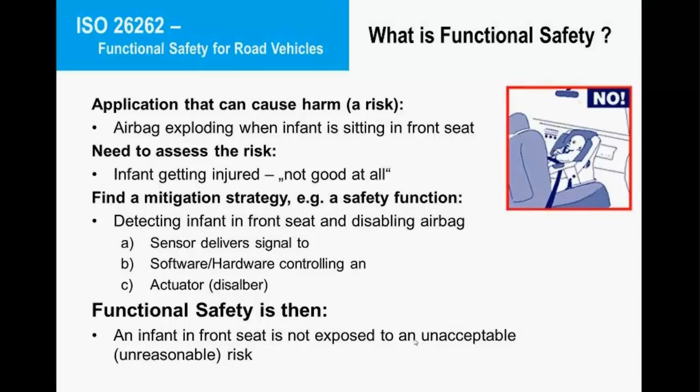So the ISO 26262, where does it come from? It's the functional safety standard for road vehicles, an adaptation of a very common standard, the IEC 61508. There are a lot of domain-specific standards for different domains which are adaptations of IEC 61508.

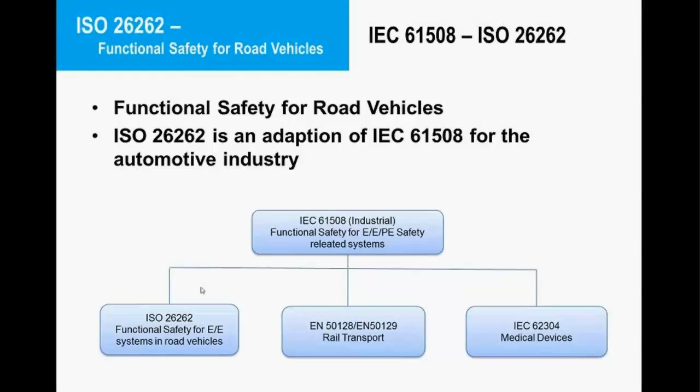We are looking here into the ISO 26262 with a special focus on functional safety for road vehicles. What are the main concepts or components of this standard? ISO 26262 provides an automotive safety life cycle which covers all phases from initial definition till disassembling of the product. The life cycle is mainly based on a V model, and ISO 26262 adds additional steps or phases to your existing V model concerning functional safety.

You're allowed to tailor the necessary activities during these life cycle phases, depending on whether you will do a complete new development or a modification from an already existing product.

The ISO provides an automotive-specific risk-based approach to determine the risk classes. It's called the ASIL, the Automotive Safety Integrity Level, and this risk approach is based on the item. But what's an item? The item is the system or product you develop. It could be, like in our example at the beginning, an airbag system, or another electronic control unit like a braking system or a window lift.

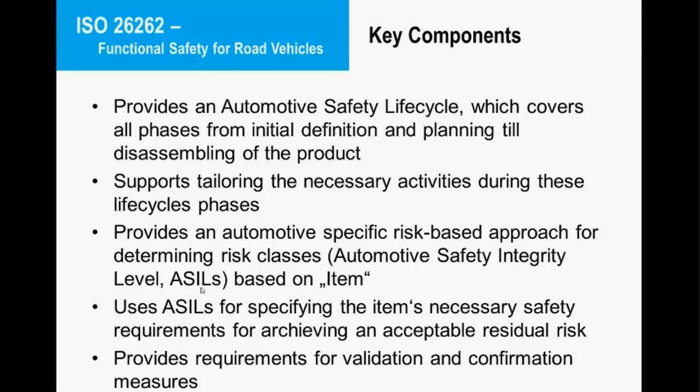Or if we think more on the whole vehicle, it could be the whole car itself. These ASIL levels are used inside the standard to specify the necessary safety requirements needed for achieving an acceptable residual risk. Also based around the ASILs, the standard provides requirements for validation and confirmation measures.

ASIL, the Automotive Safety Integrity Level, is a key component inside the ISO. It will be determined at the beginning of the development process, not at the end. What's analyzed is the function of your system with respect to possible risks or harms. Defining the ASIL, you ask: if a failure arises, what will happen to the driver and the associated road users? So it's a very high-level view from the point of the driver.

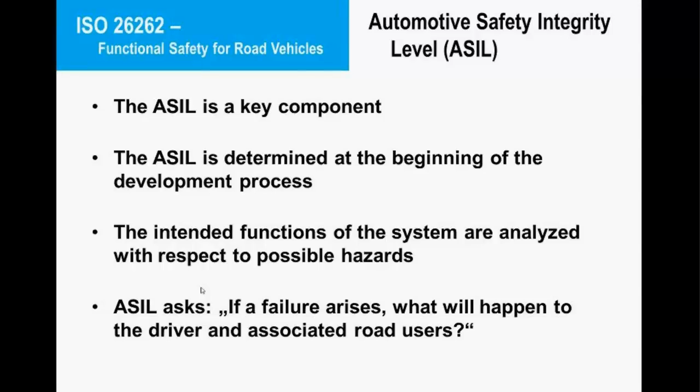ISO 26262 is split into 10 parts. The main parts are listed here, each focusing on a specific area of your development process. Part 2 is more or less the management of functional safety, how you integrate the different activities, assessments or audits into your project management plan.

Part 3 is the concept phase, mainly covering hazard analysis, risk assessment, and definition of the ASIL. Then we have the V model for part 4, with focus on the system level. Part 5 focuses on hardware level, and part 6 on product development at the software level. Part 7 focuses on production and operation, and, also interesting from the point of a software tool supplier, part 8 covers supporting processes.

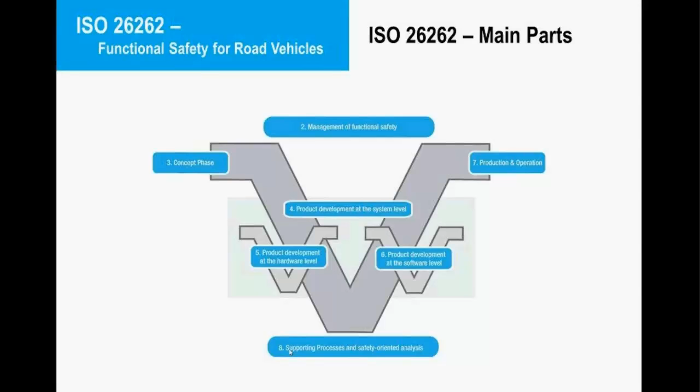This part defines not only how you have to define requirements according to the ISO or your configuration management process, but also that each software tool used during the development process has to be qualified, so that this tool is able to support your process development or product development.

So let's look a bit more in detail into part 3, our concept phase. Listed here are the steps defined inside the standard for the concept phase. The first step is to define your item: what are the functions of the product I will develop, what are the interfaces to other systems. The next step is the initiation of the safety life cycle, where you decide whether the product is a complete new development or a modification of an already existing product. The next step is the hazard analysis and risk assessment.

The last step defined in the concept phase is the definition of the functional safety concept. Here you derive the functional safety requirements from your so-called safety goals and allocate them to a preliminary system architecture.

Today we will look mainly into this step, hazard analysis and risk assessment. Looking in more detail, this step is already split into four more detailed steps. The first is the identification of possible hazards of our system. Then we classify our hazard, and after the classification, we do our hazard determination, and at last we define the safety goals derived from our hazards.

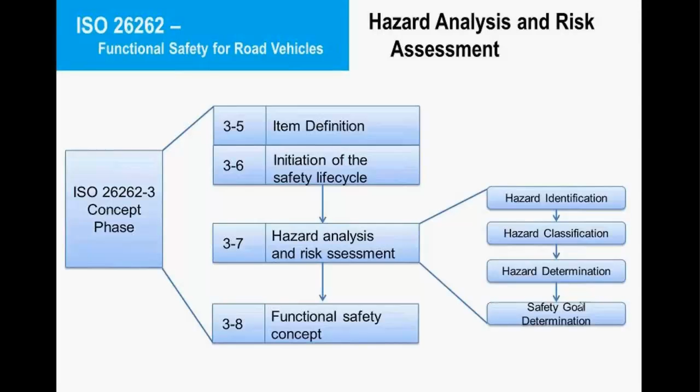So how can you classify your hazards? The standard defines 3 parameters for specifying a hazard: the probability of exposure, the controllability, and the severity of the failure. Based on this, the ASIL will be determined.

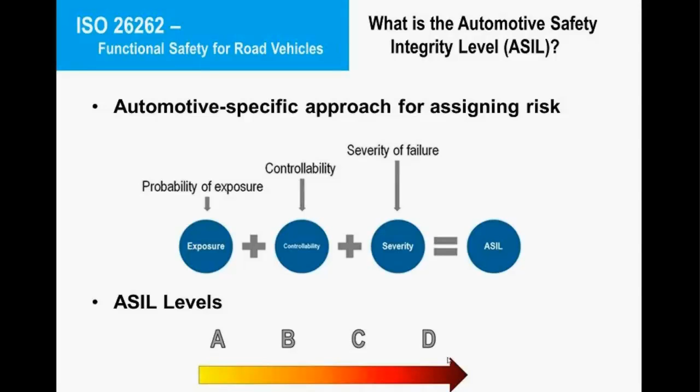Our standard knows about 4 ASIL levels: ASIL A, B, C, or D, and ASIL D is the most severe ASIL level.

Going back to our simple example, how will you determine the ASIL for our airbag system? First we look at the probability of exposure. This parameter is scored from E0 to E4, and the question is: how often will an airbag explode while an infant is sitting in the front seat? Well, I guess not so often, so we will score this around E1.

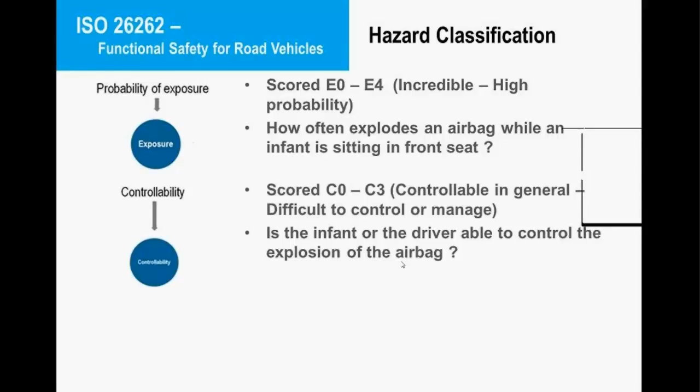The next parameter is our controllability. Scoring is between C0 and C3, and it's asking: is the hazard controllable? Will the infant or the driver be able to control the explosion of the airbag? I guess in most cases no, so we will have here C3.

Our third parameter is severity of the failure. What will happen if the airbag explodes? Here we have scoring between S0 and S3. S3 means life-threatening injuries. Yes, that can happen if an infant is sitting in the front seat and an airbag explodes. So we will have here E1, C3, and S3.

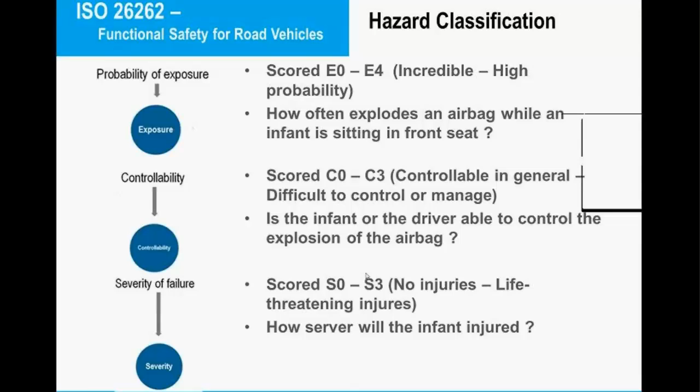The standard provides a table where you go in with these 3 parameters and you find which ASIL level belongs to your hazard. So we go in with severity S3, exposure E1, and controllability C3. What we end up with is ASIL A.

Looking at this table, you will see a lot of QM. What does QM mean? QM stands for quality management. This means the hazard is rated not to be so serious, and normal or regular quality management methods are enough. You do not need to add additional activities to your process according to functional safety. You only have to follow ISO 26262 if you have a hazard rated with ASIL A, B, C, or D.

So let's look whether we have questions so far. Okay, well, we have one question. It's a sample for a headlamp bulb, and the question is whether you need to develop this bulb according to the new ISO 26262 standard.

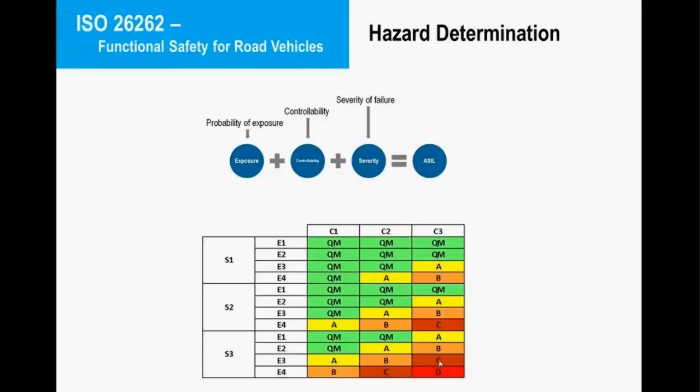So let's look at what Polarion provides for you if you need to develop according to ISO 26262. Polarion itself is, as I mentioned before, an ALM solution, so it comes with a bundle of features which will help you comply to ISO 26262 by default. You will get traceability.

This traceability is requested very heavily inside the standard. You have to ensure that the hazard is linked with the derived safety goal, with the derived functional safety requirements. You have to ensure or show that you have used all methods which the standard requests if you have an ASIL A, B, C, or D function in your product.

Additionally, the standard requests that each software tool used during your process development needs to be qualified. Polarion has done a tool qualification with TÜV Nord and is qualified as a trusted tool according to ISO 26262 up to ASIL D. Polarion is also qualified according to IEC 61508 up to SIL 3.

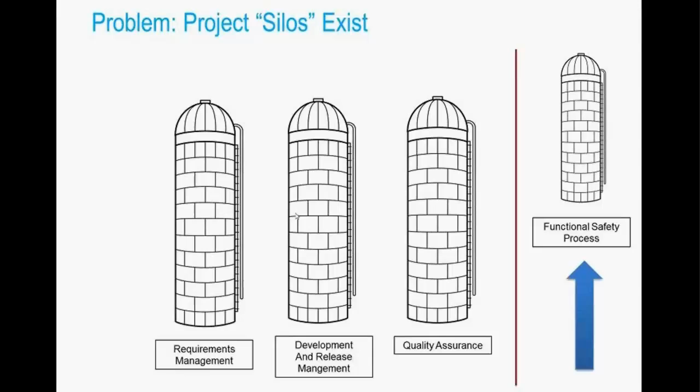If you look into the functional safety area, this area is mainly not integrated. There are at least no tools used, or if tools are used, one very common tool is Excel to collect the hazards and do the ASIL determination. But there is a missing link to integrate functional safety with all your other

project domains or disciplines, and this is the motivation behind the Polarion ISO template. It's the idea to integrate the functional safety concepts like the hazard analysis with the whole project development, to integrate the hazard analysis with your requirements management, with your design specification, with your tasks, with your test cases, so you have it all integrated and not segregated.

So what will the ISO 26262 Polarion project template help to answer? It will make the functional safety, your hazard analysis, traceable and auditable. It will answer questions like: who made changes to my hazard analysis? When were the changes made? What was done to mitigate hazards? What actions were taken to mitigate the risks? Does my ASIL inheritance, which is requested heavily by the ISO, comply with the standard or not?

It will help answer questions concerning coverage. Do we have defined at least one functional safety requirement for a safety goal? So the template itself will add additional elements to your Polarion projects and is centered around part 3, the concept phase. If you look into the standard, there is a need for additional work item types.

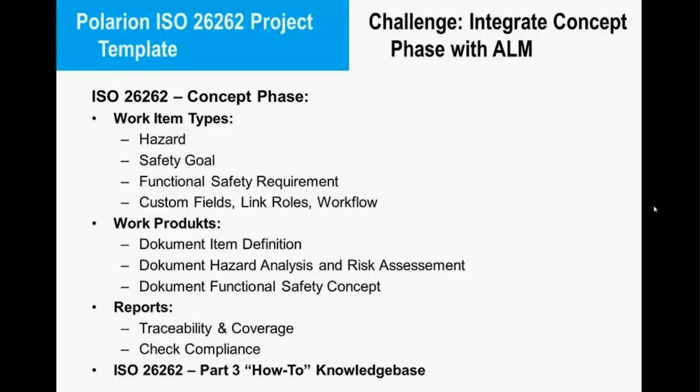Let's start with the live demonstration. The first scenario is we will examine a bit the ISO 26262 Polarion project template. We'll look at the additional work item types, at the documents, and the possible reports.

Okay, here we are inside Polarion. I'm using a Firefox browser and I'm connected to my local server, and I have prepared here a sample project which is created using the Polarion ISO 26262 project template. We have here our integrated wiki, which allows us to present all the information around our project, and we have here a special area which is the starting point for the ISO 26262 support.

Let's just click in and we will start looking into this special area which was added by the ISO Polarion template. So we have here again the different parts of our standard. We see, okay, we have an overview about the hazards which are currently defined in our system, and the status of our hazards. We have links to the relevant work products like the item definition.

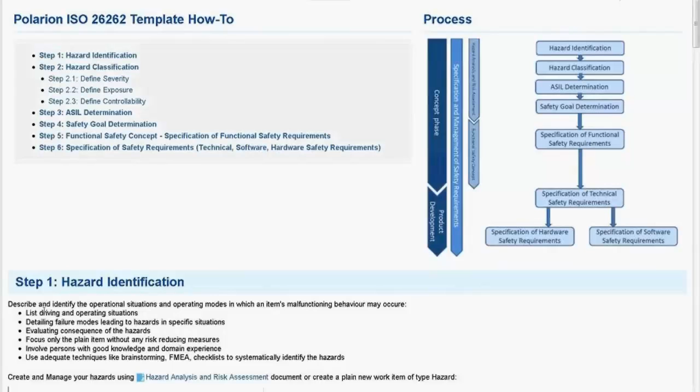And we have here a so-called how-to, and let's start looking into this how-to a bit. This how-to describes in detail part 3 of our ISO norm, and you see here the different steps like hazard identification, hazard classification, and here on the left hand you have more detailed information on what the standard requests and how you can manage this with Polarion.

The first step is the hazard identification. So you have to list the driving and operational situations in which the hazard can happen, and you can create and manage hazards by using a special Polarion document, or you can create a plain new work item of type hazard. Let's go down here.

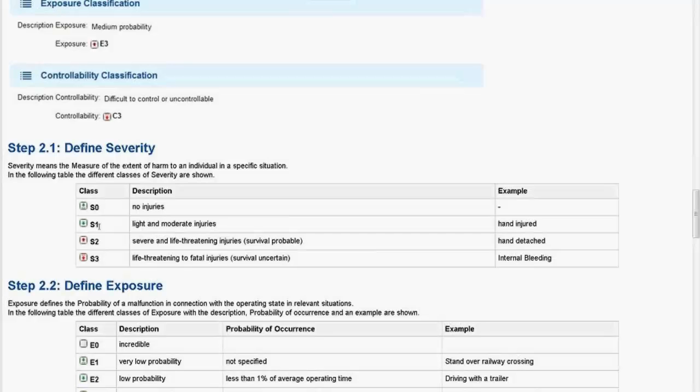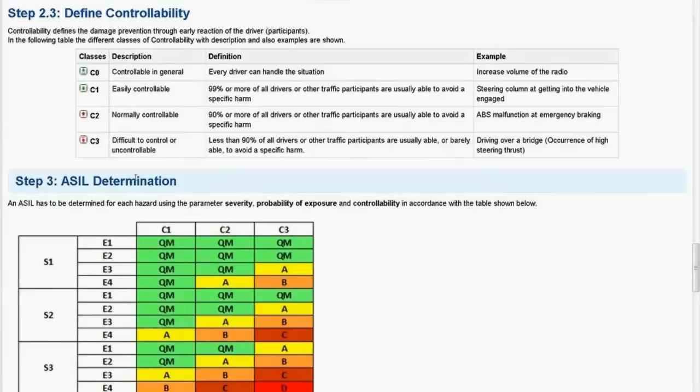You have the explanation of how you can do the hazard classification, how you can define the severity, including a short description and examples for the different levels, also for exposure and controllability. You'll find here the ASIL table, which helps you to determine the ASIL level. And the next step here is the safety goal determination, very detailed on how you have to use the standard and how you can do it with Polarion.

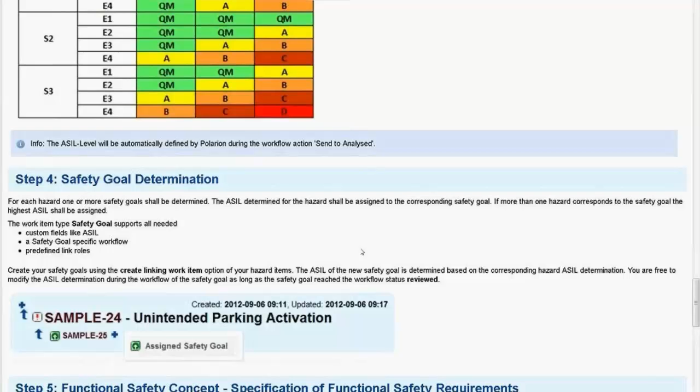So let's go back to our starting point. What else provides the Polarion ISO 26262 template? We see here a couple of reports.

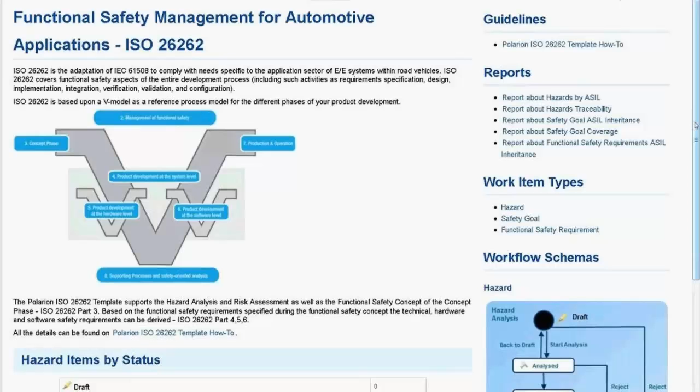It adds work item types, and let's just look what's behind this hazard work item type. We will see currently we do have only one hazard defined, and on the right hand here you see the details of the defined hazard. If you look here, you will find additional fields which are requested by the standard, like the ASIL classification.

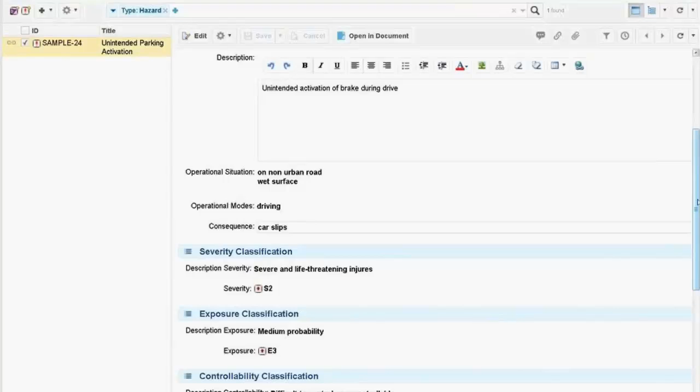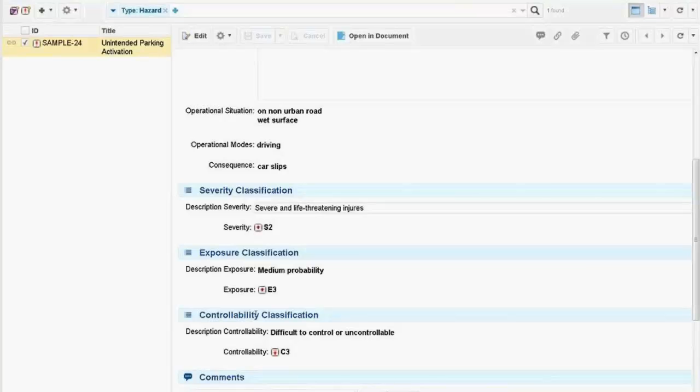We will see here, okay, inside our description we have fields which relate to the operational situation, the operational modes, and consequence of the hazard fields, which helps you to define your hazard according to the standard. Here we will find the different parameters like severity, exposure, and controllability, which are requested for the determination of the ASIL level. And we will see here the link roles.

So if we create or select this to create a linked element, the template ensures that you can only link a safety goal to your hazard. This is requested by the norm.

If we go a step down and look into our safety goals and see here, okay, I'm allowed to link a functional safety requirement to my safety goal. This is also checked by Polarion, that you only link functional safety requirement to your safety goals.

So what else is interesting? We have here the workflow, a specific workflow. So we are currently in the status analyzed, and the next status would be start progress. But I guess it's easier to look this up in our hazard analysis home. Here we have the reference to the workflow. We see our work item type hazard, an overview of its workflow.

Whenever you create a new hazard, it's in status draft. Then you will start your analysis. You will do the classification of the hazard, and after this, you will set your hazard to the status analyzed, and then the development will start. It's in progress, and after the whole development is finished, the hazard is completely and mitigated.

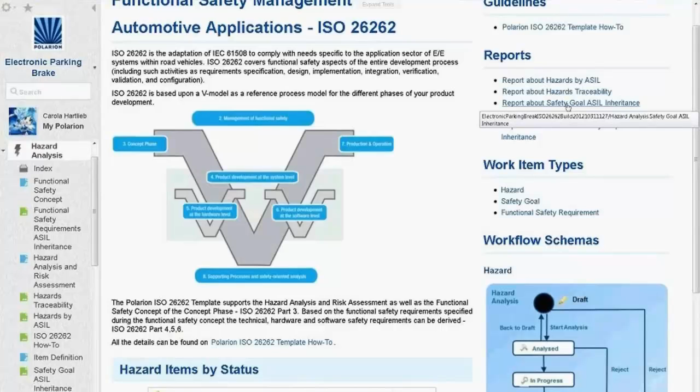So let's start it. This report focuses on the inheritance. So the standard or the rule inside the standard is for each hazard, one or more safety goal needs to be defined, and the safety goal inherits the ASIL level from the related hazard. So this report marks wrong inheritance red.

So why is this marked red? Because the ASIL classification of our safety goal is QM and not ASIL B, which was or is the ASIL rating of our hazard. So this is your starting point. You have to check the safety goal and to correct the ASIL classification here.

Next safety goal, yeah, there is everything okay. So the ASIL inheritance is the same.

It's okay. What else? You can check the safety goal coverage. The standard requests that for each safety goal which is defined in your product, you need to specify at least one functional safety requirement. So currently we have fulfilled this rule only 50%. We have one safety goal which is not related to any functional safety requirements.

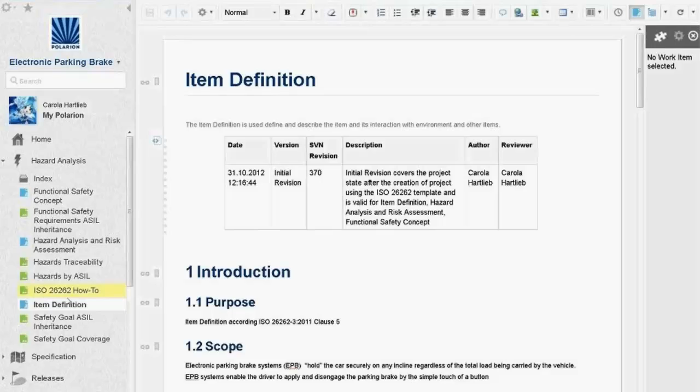And if we like to get more information around our project, we can look it up using our item definition. The item definition is the first step in our concept phase. It's a specification of our item, of our product, a product we will develop. In this sample, it's an electronic parking brake system, and we will use some of the predefined Polarion documents.

So we have here our header, which shows the current release, what has changed for this release, who was the author and who was the reviewer. We have the different chapters, a short introduction about the purpose of this document. We can list references to other documents, and here is our item description, our overall item description. What features will be implemented by our electronic parking brake?

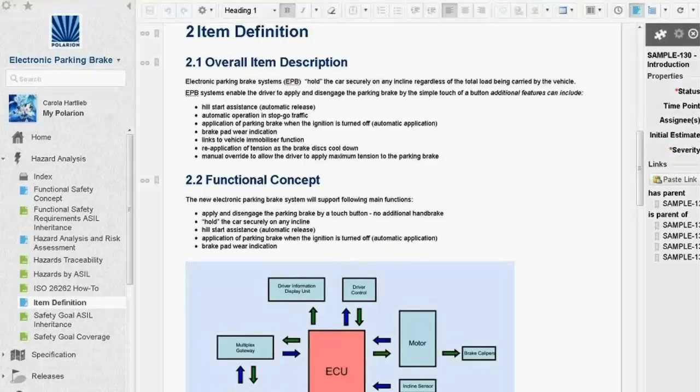Our parking brake will be applied and disengaged by a simple touch button, not with an additional handbrake. The function is to hold the car securely on any incline. We will have a function called hill start assistance, which automatically releases the brake according to the engine force. Our parking brake will be automatically applied whenever the ignition is turned off. And there is another function about brake pad wear indication.

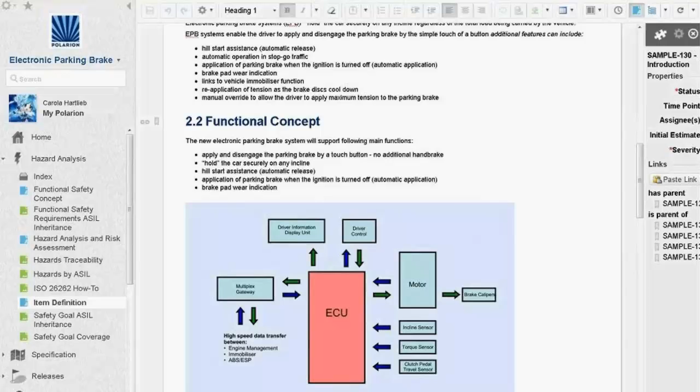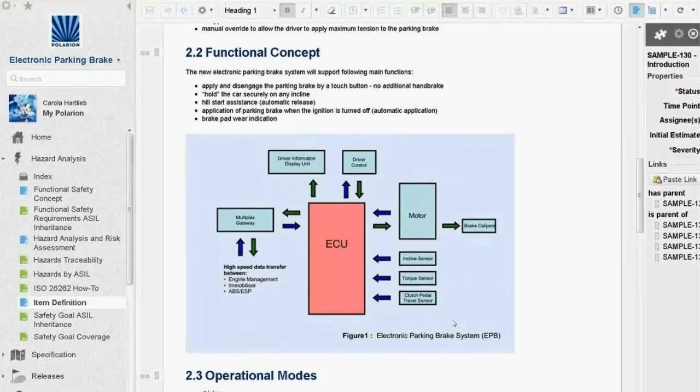Here we'll see all the components of the electronic parking brake system. We define our operational modes. Very easy in this case: we have driving or stationary mode.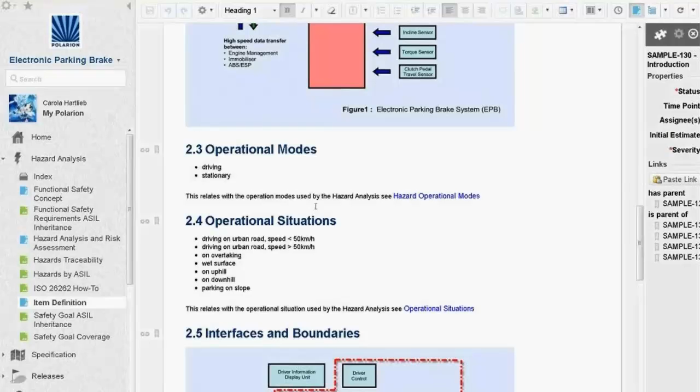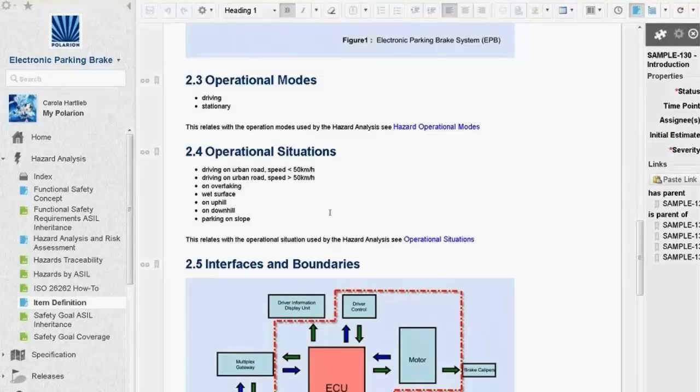We define the operational situations like parking on a slope or driving on an urban road. We define the interfaces and the boundaries of our product. Everything inside here is in our product, and we will get information from other ECUs or parts of the vehicle.

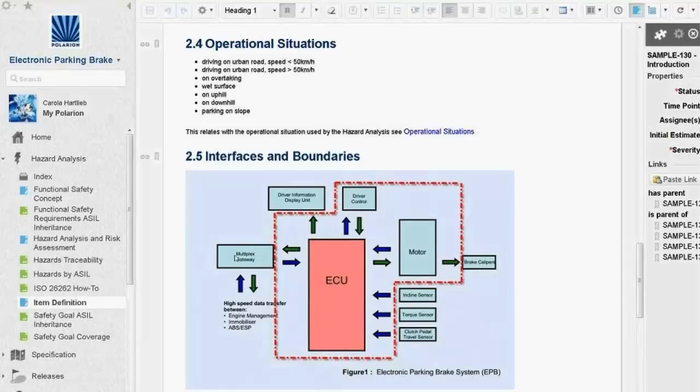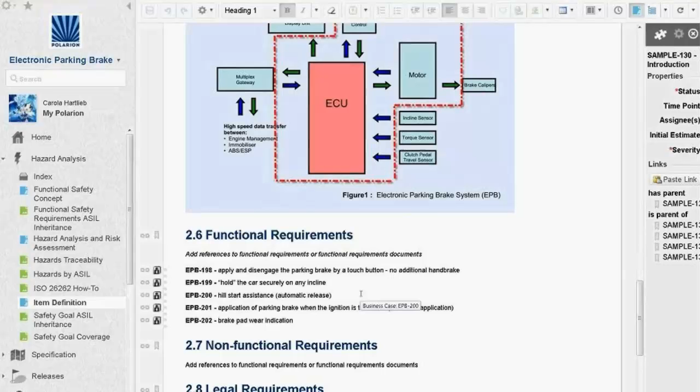We can have links here to functional requirements like business requirements. These are more or less like the functions we have defined for our electronic parking brake. So this was the first step or work product requested in our concept phase, the item definition. This can be done using the Polarion documents.

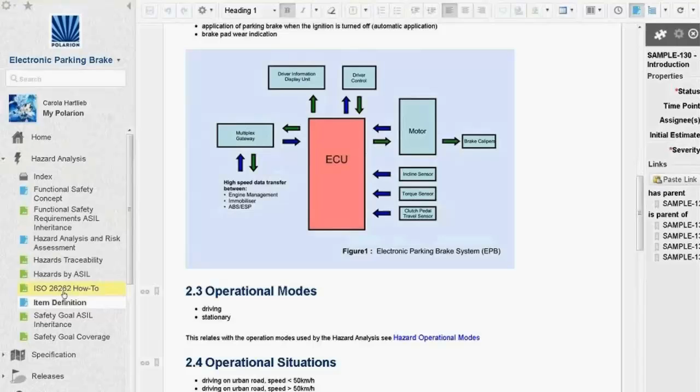The next step, if you look into our how-to, is to define the possible hazards for our system, the possible hazards for our electronic parking brake. If we follow the guidelines here, we see we can create and manage our hazards using the hazard analysis and risk assessment document.

So we will open up this document. It looks similar to our item definition. We have here a table referencing the author, the reviewers, and the revisions. And if we scroll down, we have a chapter containing the defined hazards. Currently we have one possible hazard in our system defined: it's unintended parking activation.

What else can happen? What other hazards are possible? Well, another hazard could be an unintended loss of the brake force. So if you'd like to add another hazard, you just press return, and you see here there is a new work item added to the document. It's of type hazard, and we can list here: unintended loss of brake force.

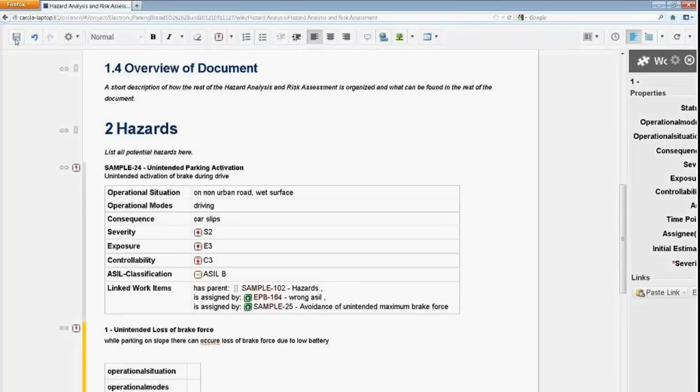We could describe it in more detail: while parking on a slope, there can occur a loss of brake force due to low battery. Let's move this around and just save. You see we have here all attributes or fields which are requested by the standard to define a hazard.

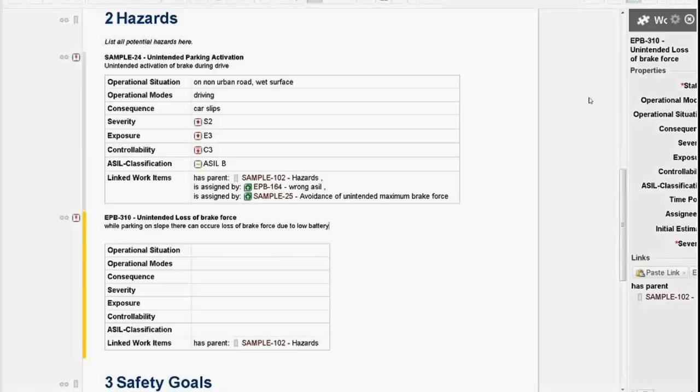So we will have the need to define the operational situation, and we can use here the Polarion work item properties pane to add this information. The operational mode, well, we have defined it's parking on slope, so the mode is stationary, and the operational situation is while parking on slope.

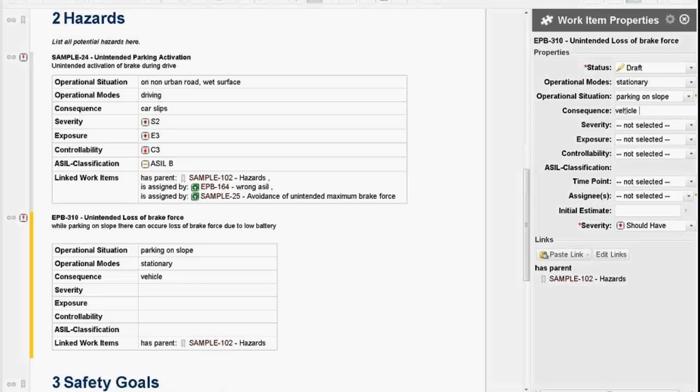By the way, the list elements here can for sure be configured to your needs. So the consequence: what will happen if we lost our brake force? The vehicle moves down. Okay, let's save.

So we have defined our hazard, and the next step, if you look back into our how-to, is the hazard classification. How is it done? It's done using the three parameters: exposure, controllability, and severity.

So let's go back to our hazard analysis and risk assessment document, and there we have our defined hazards. What you can do is, you see, we have different statuses here. This one is already classified, and our newly added hazard is still in status draft, not classified. So what you can use Polarion for is to filter this information.

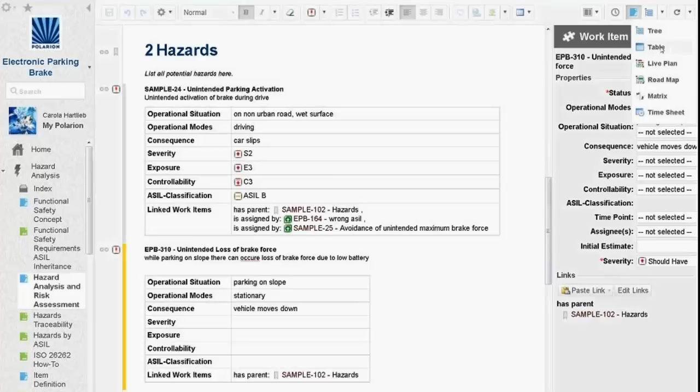So if you have planned a review of your hazards to classify them, you can just filter only hazards which are currently in status draft. This is very easy. If you're using Polarion, you can switch the view here and say, okay, now I'd like to have a table view, and I'm only interested in type hazard, and additionally I'd like to see only hazards which are in status draft. So you see the list is filtered here.

I have here only hazards which are not classified so far, and we will start classifying our hazard, unintended loss of brake force. So what we will do here is add the severity. Looking up into the table, I would say it's S2, because if someone is walking here and the vehicle starts moving, this person can be severely hurt.

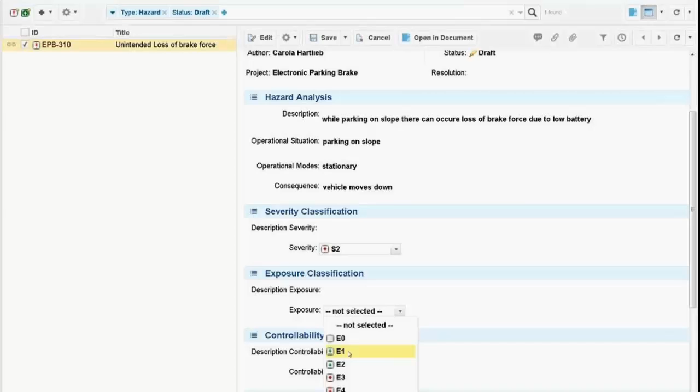Description of exposure: well, the exposure, I will rate it around E1. You will not so often park on a slope. Well, it depends where you are living, if you're living in the mountains or not.

So if we are in the mountains, let's go a little bit higher. We say, okay, it's E2, and the controllability - will it be possible to control the movement of the vehicle? Well, it depends whether you are an infant or child or just a woman like me. So I will rate it to C2, and we'll switch here the status from draft to analyzed.

What Polarion will do for you is, if you save here, it will calculate the ASIL determination according to the standard for you. It will look for the 3 parameters and calculate the rating or the ASIL level for you. You see, well, for this hazard we need not to do more. We have a rating around QM.

Let's send it back to draft and rate it a bit higher. So we have to follow our hazard analysis, because we'll have a rating higher than QM. So we switch it back to status draft and recalculate it for an S3, and the controllability - well, let's say it's not controllable - and again switch to analyzed, save this one, and you see, okay, well, the ASIL is calculated again. It's ASIL B rating now.

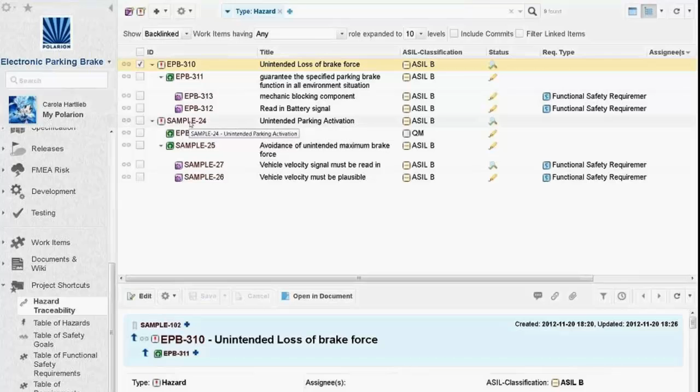So we have here our unintended parking activation. We have defined two safety - we were here for unintended loss of brake force. We have defined the safety goals, and linked or derived are the two technical functional safety requirements.

So looking into ISO 26262 how-to again, what is here - the last step in our concept phase is the specification of the technical safety of the functional safety requirements of our functional safety concepts, and then it goes down to the other domains like the product development, like the software development. You can integrate now your hazard analysis with your other areas, like we can say, okay, where is my hazard.

Let's check again our hazard traceability with our report. Unintended loss of brake force - one thing was read in the battery signal, and I can say, okay, I go down and I will define a functional safety, a refining safety requirement, and this is a software requirement. So I need a function to read in and calculate the battery signal.

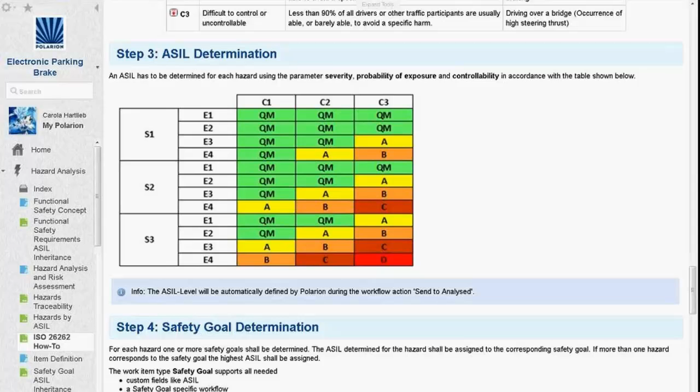There's also a question about the license costs of this tool. I'd suggest you look at the Polarion homepage at polarion.com, where you'll find all the information around the products, because licensing costs differ between the different tools. If you're interested in the ALM tool specifically, just select it there and you'll find pricing information.

So then there's another question popping up - a very, very good question. What is the difference between FMEA and ASIL? Well, I've tried to figure it out. From my point of view, the ASIL is from a very high level perspective - you're looking at your item, at the function of your item, from the point of view of the driver: what will happen when something goes wrong. The standard ISO 26262 uses FMEA at the system area or at the hardware and software area to prove that your safety concept is able to mitigate the risk.

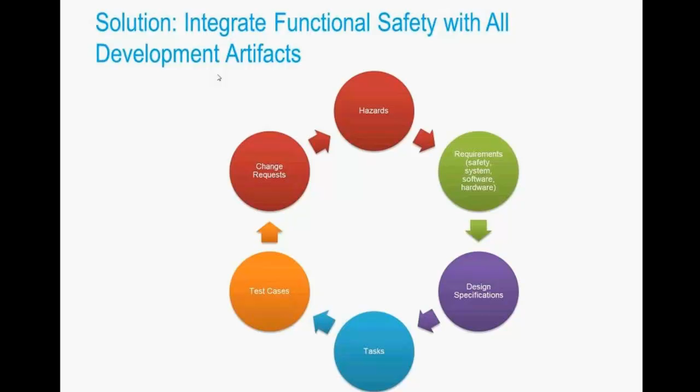Okay, hope I've answered all your questions. So we have just two slides left. What's the main idea behind integrating hazard analysis with an ALM solution? It's the idea to integrate all your project artifacts to get it traceable and auditable.

What can you do if you say, well, Polarion looks nice, I need more information? Just go to the Polarion homepage at polarion.com. You can download a free trial, you can try Polarion Live - Polarion provides hosted servers where the products are installed, and you can try Polarion Live on a Polarion service without any installation on your PC. You can watch videos or short viewlets about the concepts. In the resources area, you'll find tutorial videos like what are Polarion documents, how can I create a document, how can I add work items, how can I use the round trip. By the way, there's a very nice integration with Microsoft Word.

Okay, so there are two more questions that popped up, about ASIL decomposition. We didn't cover ASIL decomposition in this session, but maybe we will follow this up in another webinar. ASIL decomposition is a concept for how you can reduce the ASIL by dividing one functional safety requirement into two or more functional safety requirements with a lower ASIL. Currently in the ISO 26262 Polarion project, we do not have support for ASIL decomposition, but you can do it manually and reduce the ASIL level in your functional safety requirements. This is allowed.